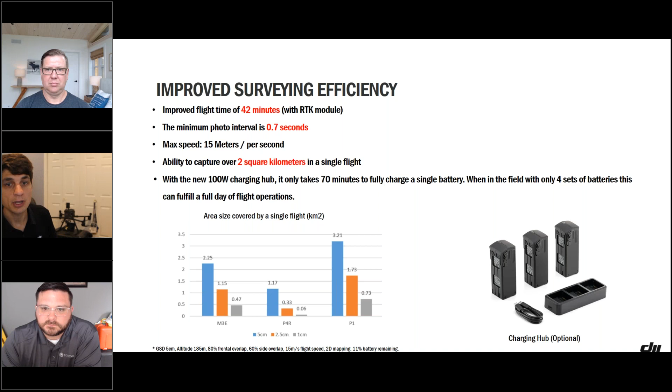So yeah, and then also a little bit faster charging. If you do need to just stay up in the air all the time, it takes 70 minutes to fully charge a battery, but we're seeing 20 to 90% on these Mavic 3 batteries in like 35 minutes. And so having that battery charging hub and a couple sets of batteries, you should be ready to roll.

I'll ask Jacob and Colin, what have you guys heard about some of the difficulties of flying cell towers, especially flying cell towers up close? Would you say transmission and RF is going to be one of those main factors? Yeah, absolutely. It can be, you know, seemingly random. I'd say 98% of the time it goes off without any real issues.

Sometimes we'll see GPS issues. Sometimes there's transmission issues. I will say I've not experienced any to date with the Mavic 3 Enterprise. So it seems pretty rock solid in that regard. That's great to hear. Yeah, and with the OcuSync 3 Enterprise transmission system, that's a nice upgrade from those that were doing cell tower inspections with the Phantom series.

So we've got more range, or that essentially equates to, if you've got more interference, you're still going to be able to punch through and have some fairly good video feedback. And if you're talking RF, cell tower inspection is going to be one of the hardest places to fly. You may not get a whole lot of compass issues, but you always want to maintain control of the drone. You always want to maintain GPS lock.

And when you're talking about something that's more economical on the enterprise side, from what I've heard, this drone, compared to some of the others on the market, can really keep that rock solid transmission system. If you need something more though, we've got dual and triple redundancy sensors when you come to the M300.

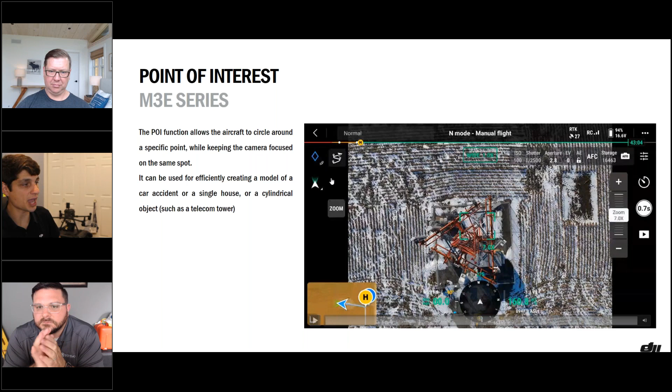Well, you hit the little diamond icon, and when I click on the diamond icon, it pops up my new orbit tool. I'm then going to manually fly the drone off of the tower and focus on the first rad. And then at that point, I can change my camera settings. Remember, we've got a 0.7 second trigger speed here. So I'm going to set my timed or time lapse all the way up to 0.7 seconds. So I've got that locked in.

And then once I've centered the rad, I can click on the orbit and the point of interest is enabled. I can then trigger on my time lapse. And now all I have to do is hold the right stick of the controller. And you can see there's a C1 that says speed set. I'll just tap on that and it's going to lock in the speed. At that point, I have a drone that's capturing imagery and freely spinning around a cell tower.

So I've done everything, and I know that was a lot of steps. Basically fly over it, tap one button, back off of it and focus on the rad, tap the orbit button. Take the right stick, go to a very consistent speed, lock in the speed, and then tap on the time lapse button, and I'm ready to go. From there, once it goes all the way around, I'm just going to drop the altitude a little bit and slowly make my way down the tower.

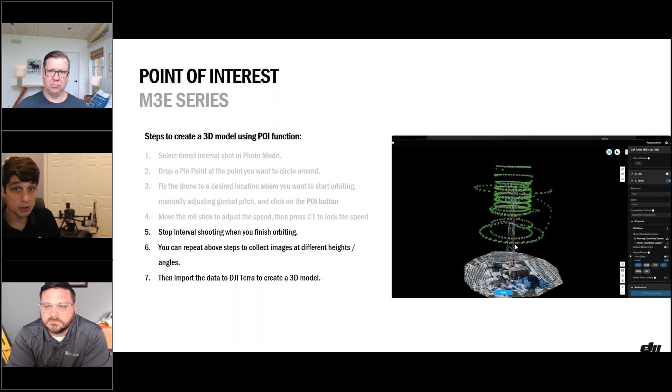At that point, you can pull the SD card out of the drone and put it into whichever stitching platform provider of choice. We do have DJI Terra as a photogrammetry engine, but we're going to be mostly talking about Pointivo. I do have one last shout out.

That's going to be with DJI having the mobile SDK and the payload SDK. So first off, the mobile SDK is going to allow third-party clients or partners of ours to control the drone or write an app that installs onto the controller that controls the drone. And we may not get everything right within the Pilot 2 app. We fully understand that. There are a lot of use cases for drones across the enterprise perspective.

But when we look at some of the other clients that are in the cell tower community, I do want to shout out one partner, DroneLink. The one reason why I wanted to shout them out is we do have a somewhat significant percent of guyed towers, especially here in the Midwest.

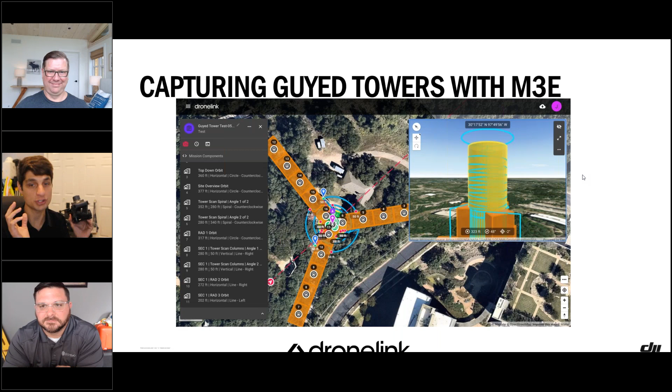I'm in Eastern Iowa. And so if you do need to make a more complex flight mission and you want to test out something other than the Pilot 2 app, because the point of interest orbit is going to freely be spinning, and don't trust the obstacle avoidance around guy wires. I don't care what drone you have and how good of radar it has, just don't trust it. And if you can make a little bit more complex flight plan, something like that, DroneLink is one of those partners that I wanted to shout out that's able to help.

But now that you've captured the data, the really crisp, clean, accurate data with RTK, how do we then take the data and put it into Pointivo? And at this time, I'm going to transfer it over to Jacob to talk a little bit more about Pointivo in general, and then Colin's going to be walking through the actual platform.

Yeah, thank you, Kyle. And yeah, we have no personal experience whatsoever in clipping guyed tower wires with drones. Colin's smiling. Let me, I do have a poll question I want to kick off while we maybe banter a little bit, and then we'll jump right in, Jacob.

Sure thing. With this poll question, do you currently use any drone software for processing data after you've captured with the Mavic 3 Enterprise? So a very fitting question of what do you do with the data afterwards? And we're going to be showing you exactly what you can be doing with Pointivo. So pretty excited about that.

Colin, you've maybe clipped a tower or guy wire or two in your day, or are you a perfect pilot? I have indeed. It's not a fun experience, but I will say, if you're flying near towers and guyed towers especially, it's definitely nice to have DJI Care. Yes, it sure is. And it's not saying that we're going out and doing this every day. It's just with these environments, it's probably one of the most difficult environments to be flying around when you're talking about the entire enterprise space, just a lot of guy wires.

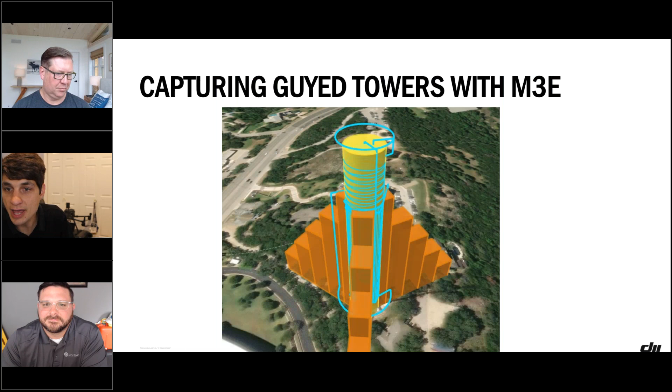All right, let's go ahead and close. Looks like about 2/3 of people are using drone software already. So we'll close that, and let me go ahead and change presenter over to Colin.

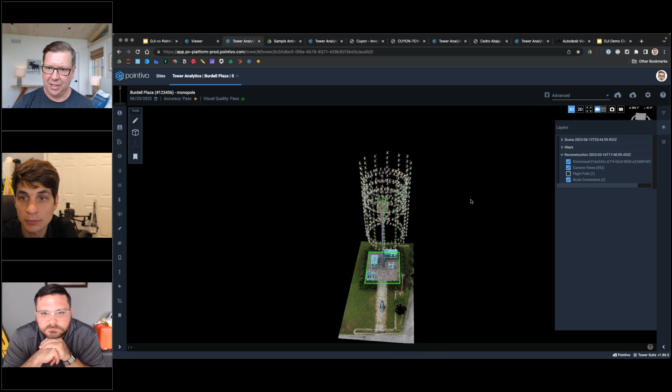Our dashboard has basic information, including tower names, tower IDs, owner, type of structure, and we present all of that in a map view here as well. From here, you can launch into a specific tower by choosing it from the map or from the list, and once you do that, you get brought into our tool. So I've got a tower here that we've done various types of processing on, but before we get into the specifics, one thing I wanted to touch on: we talked about different ways of capturing during the presentation on the DJI side.

We have spent a lot of time optimizing flight paths for tower capture, and we provide our customers an automated flight solution that we've customized to minimize the amount of time on site while ensuring that we produce high quality models. You can see here it consists of columns and orbits. The columns ensure that we get the entire structure. The orbits focus in on the areas of most interest, namely the rad centers and the compound, so that we get a full picture of the entire site, but lots of detail where it's most important. On a tower of this size, we can capture this in 20 minutes or so.

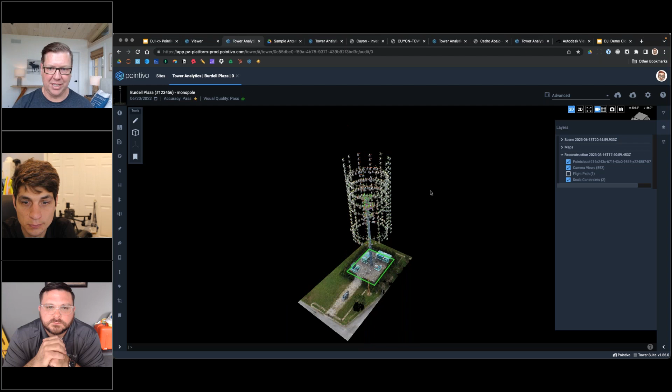On a larger guyed tower, maybe 500 feet, 150 meters, it may take 45 minutes or so, but it's a very fast, efficient way of capturing. It also cuts down on the amount of data, which means faster processing times.

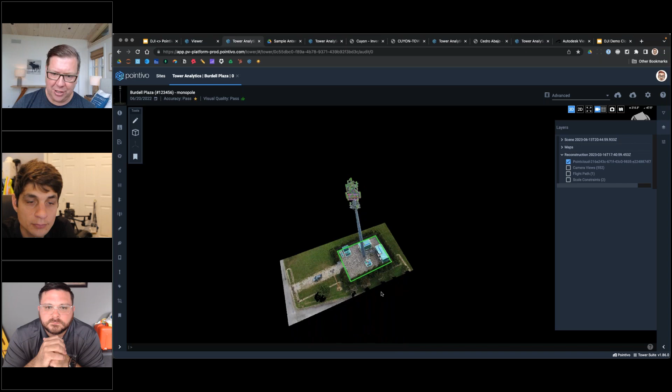So once we've captured the data, Pointivo processes it to create the digital twin, and that's what we're looking at here in 3D space. But I also wanted to point out one other thing, and that is the patented scale marker system that we've developed. So Kyle talked earlier about the benefits of RTK, and absolutely RTK is a great solution to ensure that you're getting accurate models. There are other solutions out there as well, but we've developed what we think is a very easy to deploy, inexpensive, portable way of ensuring that the digital twins that we are creating are dimensionally accurate.

And so you'll see that it's comprised of two targets. They're at a known distance apart. And so when we create the reconstruction for this tower, we know what that distance is supposed to be, and we can use that to scale the model. We use the second set in order to validate that measurement. And from that, we're able to calculate an accuracy score. And so the benefit of this, again, is that it's low cost, it's easy to deploy, and really works quite well for us to get relative accuracy.

With that accuracy, we then know that everything in the digital twin is scaled appropriately. And because of that, the measurements that we're taking when our AI detects panel antennas, for example, are highly accurate. We're using those measurements in determining model numbers and so forth, and so we're able to get really enterprise engineering grade accuracy using, you know, relatively, I would call them kind of prosumer drones, the low end of the enterprise drones.

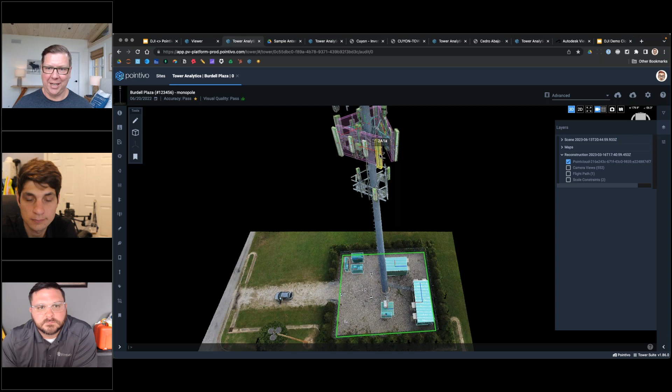The Mavic 3E is great. Historically, we've been working with the Phantom 4 Pros. We can use other hardware as well. We're relatively drone agnostic. Certainly, even better sensors are better yet. But generally, we can work with what the customer has.

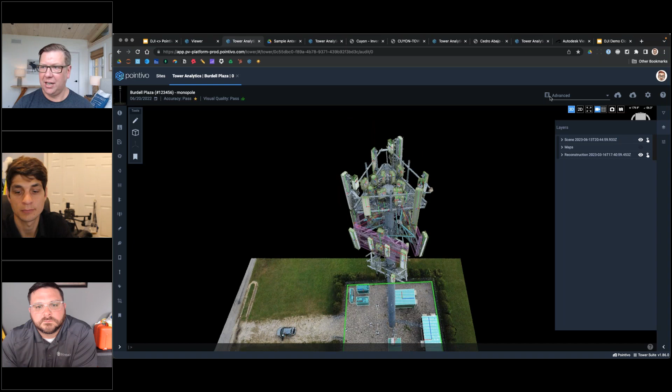Close that up here, and I wanted to dive in a little bit on, I touched on engineering grade accuracy and what we're doing there. I'm going to hop into our mount mapping workspace, and for those of you who may not be familiar, mount mapping is conducted generally before any modifications are made to a mount system. So in the US at least, generally each carrier is on their own mount, and each mount is dedicated to just that carrier, and that's where they'll have all of their equipment installed. When they want to add antennas, change out antennas, and so forth, one of the requirements is that they demonstrate that the equipment that they're going to be putting on there is able to be held by the mount system. It's generally kind of bad form if your equipment falls onto the carriers below you.

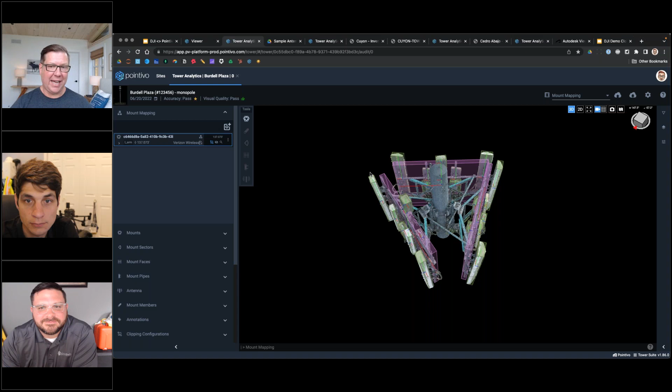And so in order to do that, the first thing is accounting for what's there. And that means not just the antennas and the radios and so forth that are mounted, but also the structural steel members. I'll turn off a few of the layers here and toggle off the point cloud just to kind of give you an idea of the types of things that we're modeling here. And for the antennas, which are kind of the simpler use case, the first thing that we're doing is forming a 3D bounding volume around the antenna. From that, we're able to get dimensional information.

And so if I select that and open up our scene inspector here, we can see it has an area and a volume associated with it. It's got elevation, azimuth, and tilt. It's kind of the pitch, roll, and yaw. And it's got X, Y, and Z dimensions as well. All of the geometry that you've seen modeled here on this mount system and throughout this tower also has metadata associated like this. So we've got metrics for all of that geometry, and that includes things like height above ground level, latitude, longitude, etc.

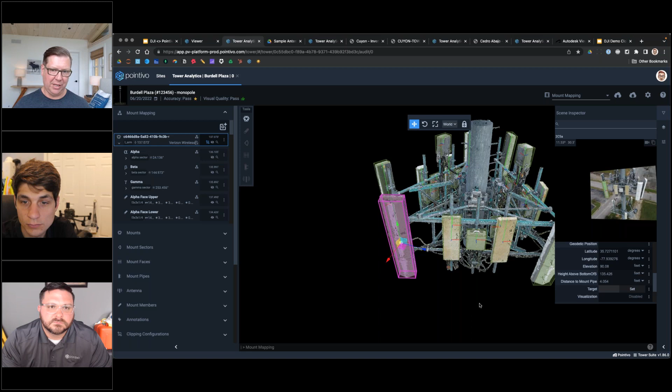Once we've got the dimensions for an antenna, we are then able to take an extensive catalog that we've built of thousands of different types of equipment for cell towers and filter down that catalog to just those items that are within a small tolerance of the detected dimensions. And then we take the visual characteristics, and I'll toggle on our image viewer here. We take the visual characteristics of the antenna in order to actually make a determination about the specific manufacturer and model.

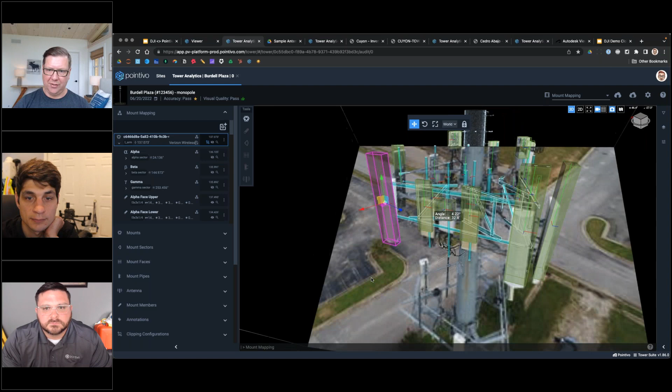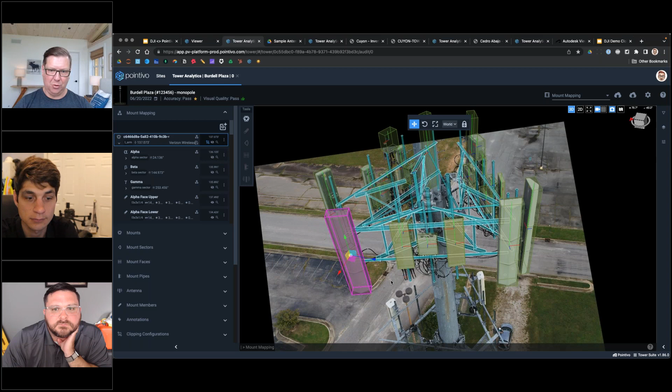This is one of our patented technologies, virtual navigation, which allows us to move around and rotate around the tower in 3 dimensions, overlaying all of the geometry we've generated while viewing the high resolution imagery. It provides a very natural way to move about the 3D space, see the highest fidelity data available, and also see the modeling that's part of our digital twin overlaid on top of it. So once we've identified a particular antenna, I'll find this one in our list.

Here we are. If I expand this out, I can see the antenna details. The first part is a lot of what we already saw in the scene inspector in terms of metrics about the size and location of it. But we also have all of the information from the manufacturer about that antenna, including the model number, dimensions, weight, etc. And if the manufacturer makes it available, we can open the data sheet for that particular model on the manufacturer's website.

So that's what we're doing in terms of the antenna detection, and antenna detection is part of our mount mapping solution. It's also part of some of the other offerings we have, including inventory reports and others. We are also, as we talked about, modeling all of the steel members.

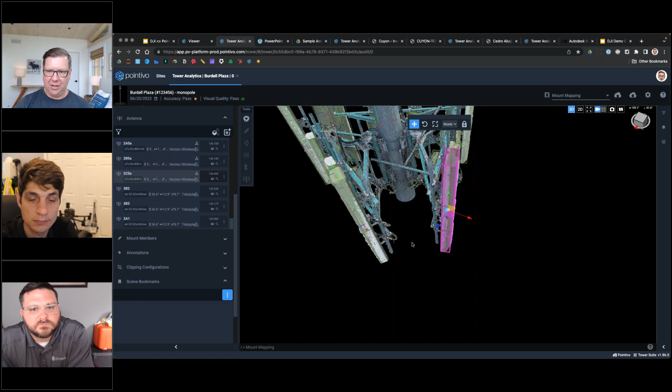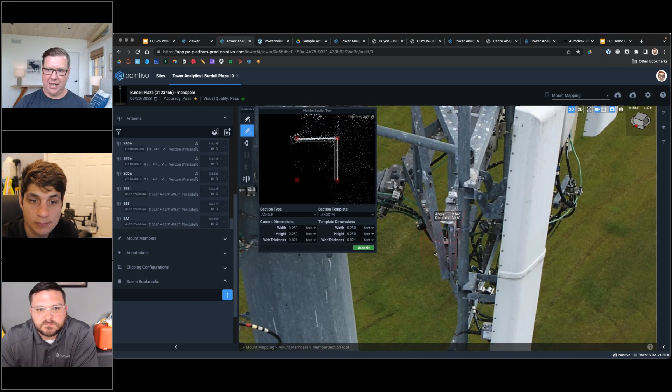But we take that a step further, and we are using the imagery to look at the edge profile and actually make a determination about that thickness. This is all handled in the back end by our AI algorithms. The user themselves has access to this through our tools, so any changes that need to be made can be, but it gives you the full capabilities as the user.

And again, we're seeing the visual navigation here, and can see from all different angles the drone has captured this, from the determined member type overlaid on that.

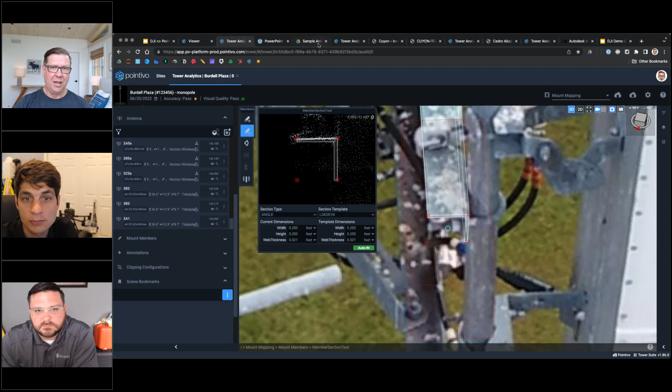So from this information, when we've done a mount mapping, we can produce reports from that. This is an example of our mount mapping report. It includes drawings like you see here. These drawings are actually exports from the DXFs that we're generating, so we're creating CAD files for these. Images of those CAD files are included in this report. We also have dimensional information, a table of all of the appurtenances installed on that mount system, etc. And then that repeats in increasing detail for each of the sectors in that mount system.

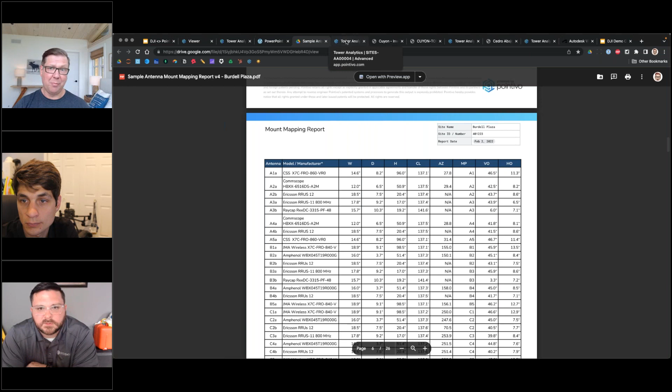We're applying, and we're running a little short on time here, so I'm going to speed through this quickly because I want to make sure we get a chance to answer some questions. But we are applying that same type of technology for other types of reports. So for example, this is a large tower, has over 100 appurtenances installed on it, very heavily loaded, and we're able to create an inventory of everything on that tower using the approaches we talked about previously.

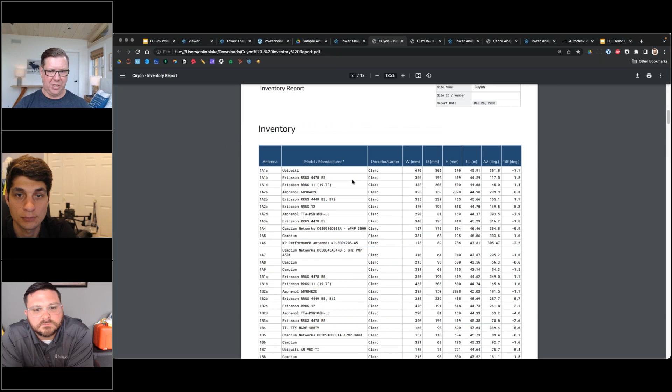In this case, we're focused primarily on that inventory, not so much on the structural elements of the mount system, and are producing a report similar to what we just saw, but really just focused on the inventory itself without the structural drawings. And we can do a similar type of thing, looking here at a different of our visualization techniques, but we can do a similar type of thing with AI detection of deficiencies on a tower.

So, for example, this is a tower in pretty poor condition. On the right here, you can see how we're selecting an image that mimics our position and orientation in the 3D scene. This is, again, one of those technologies that we think makes our approach to digital twins somewhat unique because we give you such an intuitive way to navigate things. But we've had our AI annotate different deficiencies throughout this tower, and each of these blue dots represents one of those.

If I click on one of those, we can also see it overlaid in the imagery. You can see this tower here has holes in many of the members. Throughout the tower, there's a lot of rust. We've got equipment that has come loose here, and if I zoom in, we can see some of the hardware has come loose where this is mounted.

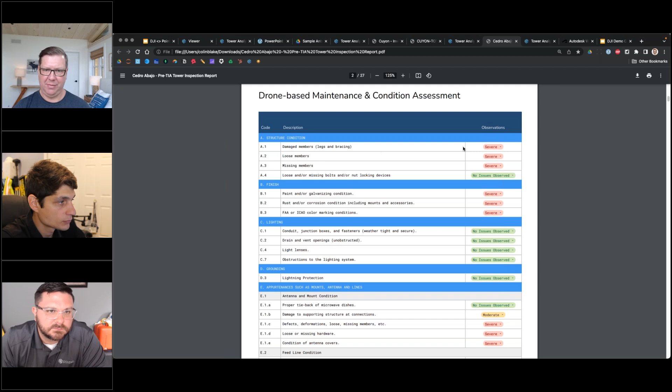We roll all of that up into an inspection report, modeled on the TIA 222 standard, indicating all of those things that can be reasonably determined from a drone, whether or not we observed those conditions. In this case, there are damaged members with some severe issues. We go through the whole standard in that manner and then provide a visual inventory of the issues that were found. In this case, you can see one of the fences has come down around the tower as well.

We also apply the same type of techniques to recognize ground space equipment, and so this is another tower where we've done that, identifying generators, ground pads, and so forth. And to the point earlier about being able to generate CAD files, we can do that with the ground space equipment as well, essentially allowing the user to bring this into a CAD system and do additional planning.

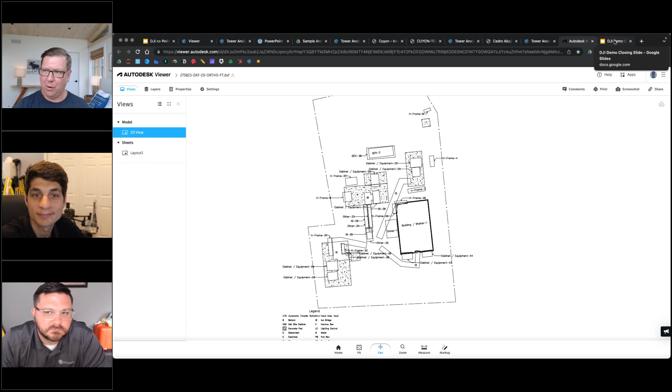So with that, I know we moved pretty quickly through that, but again, I wanted to make sure that we have time to answer any questions.